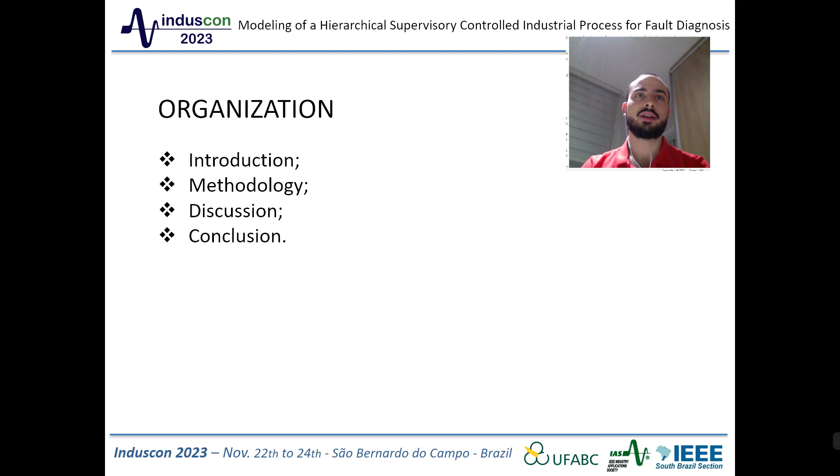This presentation is divided into introduction, methodology, discussion, and conclusion.

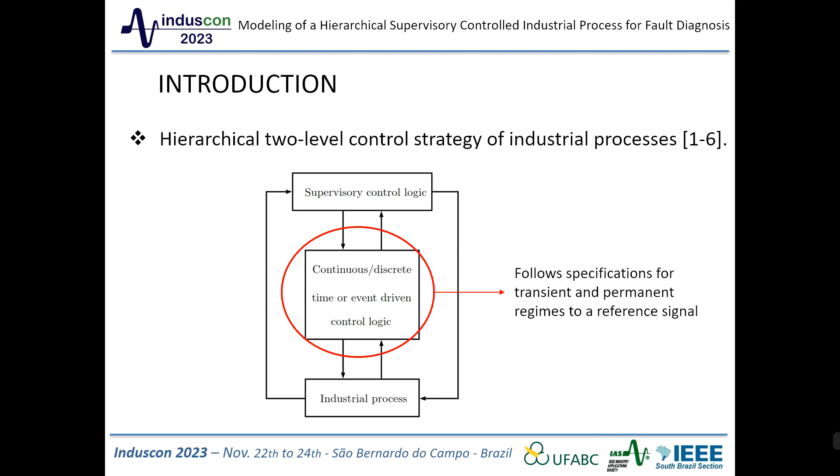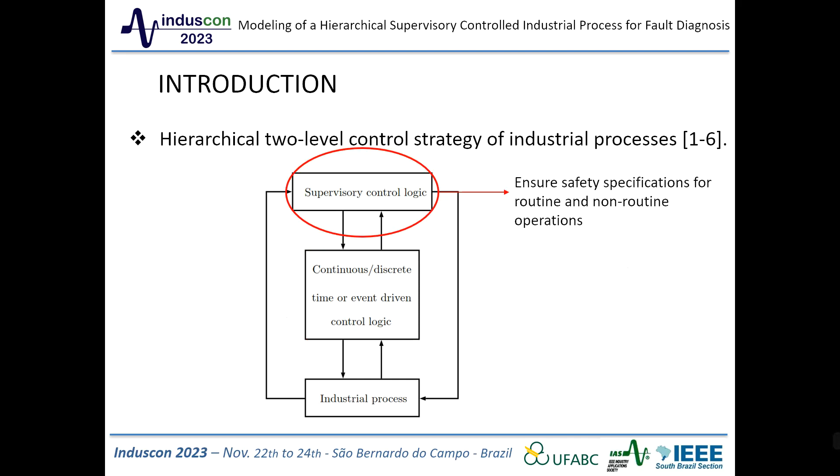We can find two-level control systems in industry. At the lowest level, we have continuous time, such as proportional integral derivative control, implemented to guarantee that the system behavior follows the specifications for transient and permanent regimes to a reference signal. At the higher level, a supervisory control strategy is implemented to ensure safety specification for both routine and non-routine operations. However, both levels of control strategy are designed considering the nominal behavior of system components, and thus the consequences of fault events are usually not taken into account in the project of control logic.

At this point, fault diagnosis is an important part of the safe operation of industrial systems, since the occurrence of a fault event can lead the system to unpredictable behaviors.

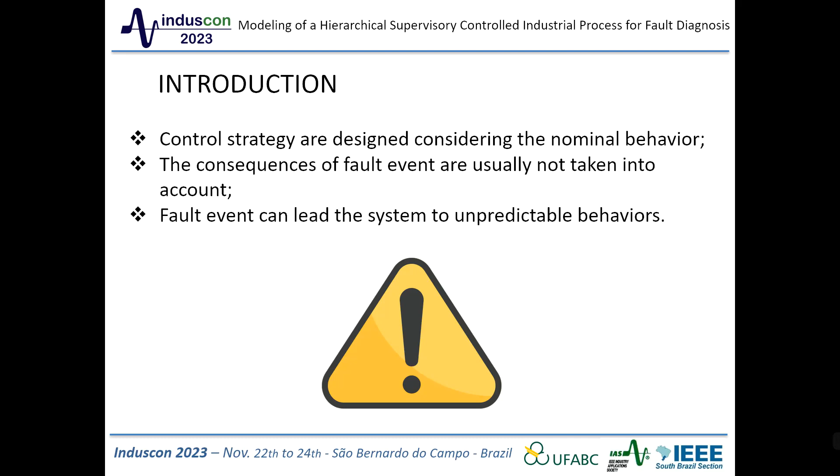We are dedicated to following the plant model behavior using a diagnoser, obtained by labeling the system states as fault-free or not, and computing an observer of the labeled model. If the diagnoser reaches a state with only faulty labeled states, the fault is diagnosed and a signal is sent to the system operator.

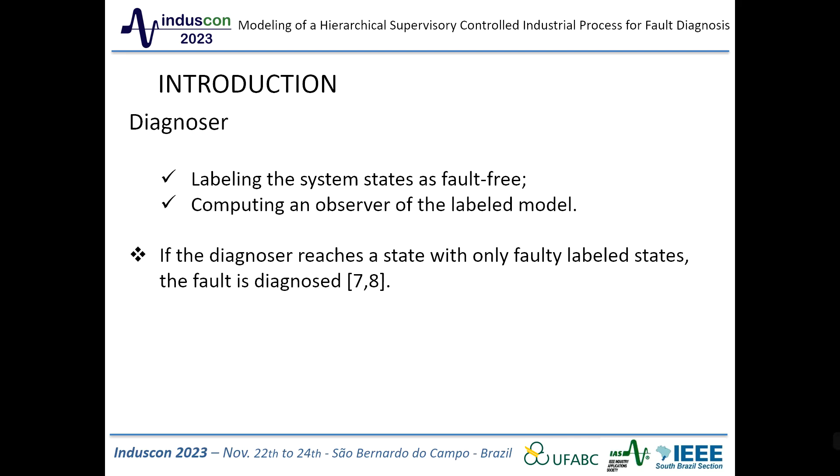In this paper, a modeling strategy to represent both the fault-free and the post-fault behaviors for a common industrial process is proposed. To do so, we modify the component models of the system used in the supervisory control project to introduce the fault event and the post-fault behavior.

The global post-fault behavior of the system is computed by the interaction of the supervisory control logic already computed in the project stage. In this work, we use a real industrial process as a case study.

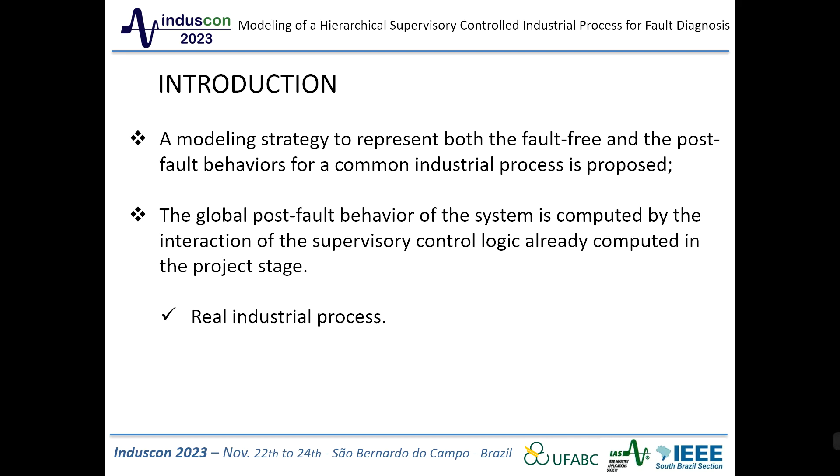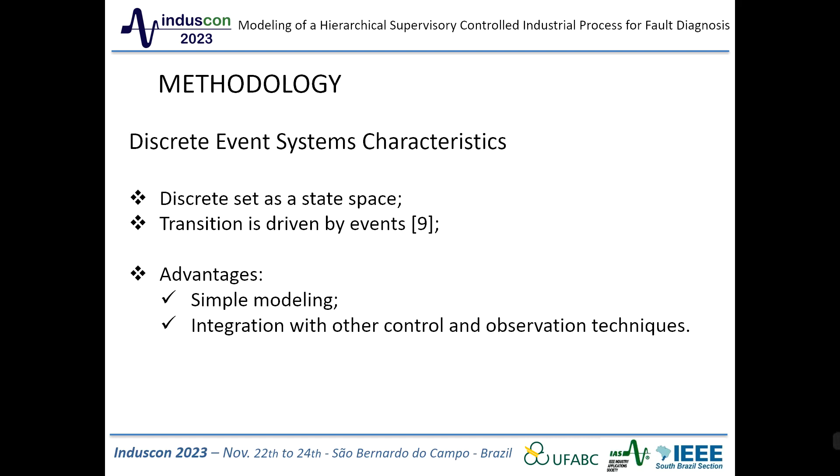Discrete event systems, as used in this work, present a discrete set as a state space, and the transition is driven by events. Considering systems like this brings a series of advantages, such as simple modeling and integration with other control and observation techniques. One of the formalisms used to represent language generated by discrete event systems are automata.

Using this tool, the language is represented with well-defined rules, with easy representation of the system using a state transition diagram. The states are represented by circles. The transition between the states are the events, and are represented by arcs. The initial state is an arrow without origin, and the marked states have double concentric circles.

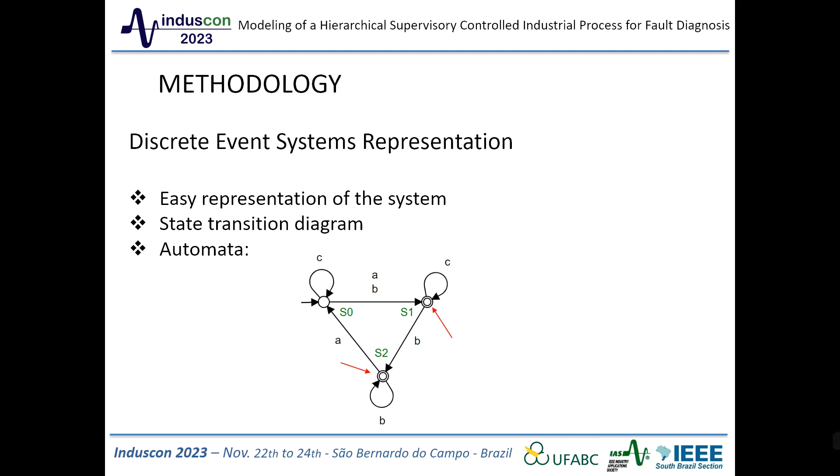The system considered in this work is a pilot plant manufactured by Smar Industrial Automation, installed at the Federal University of Santa Catarina for training and research of advanced control and automation technologies.

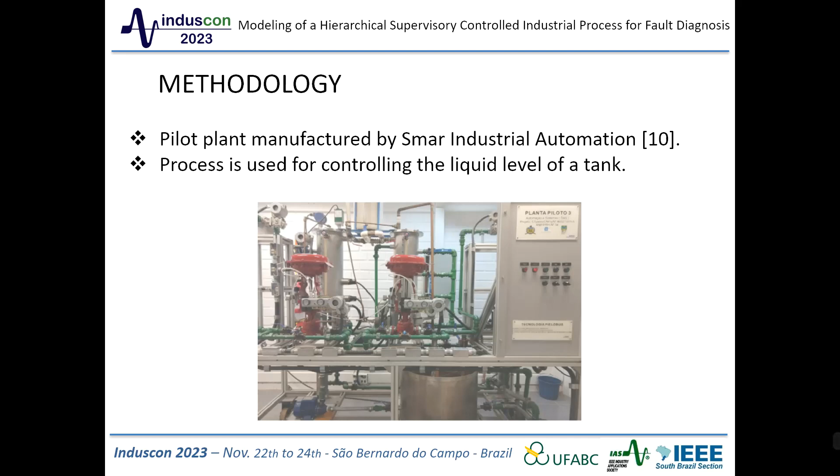The industrial process is used for controlling the liquid level of a tank. To do so, it consists of a pump that supplies liquid to the tank and a pneumatic valve that is used to regulate the liquid level of the tank.

The instrumentation of the system is composed of two intelligent foundation field bus sensors, a level sensor in the tank, and a valve position sensor, which are used to implement a distributed PID control system. In addition, the PLC also receives the signal from a selector switch implemented on a human-machine interface panel, and it can control the pump.

The supervisory control for this system is designed to prevent underflow or overflow of the tank due to misoperations. Thus, the supervisory control limited the system to the nominal behavior of the system components.

Thus, if a fault event occurs, its detection must be computed to allow the replacement of the faulty device. The fault behavior is not desirable since it causes deterioration of equipment.

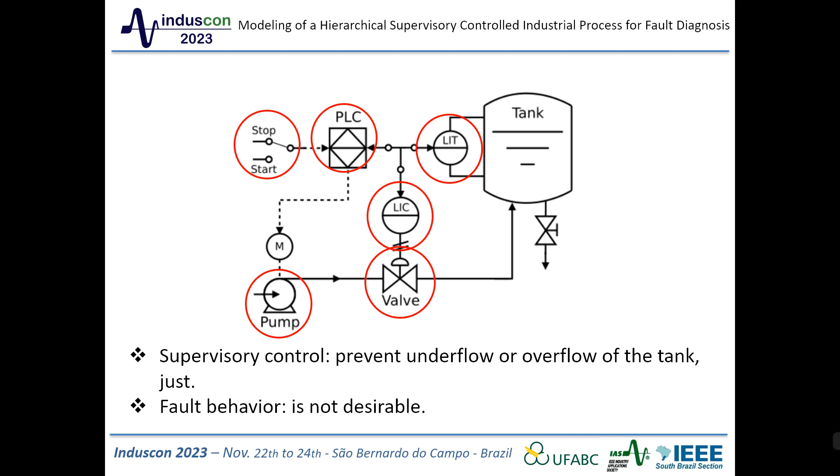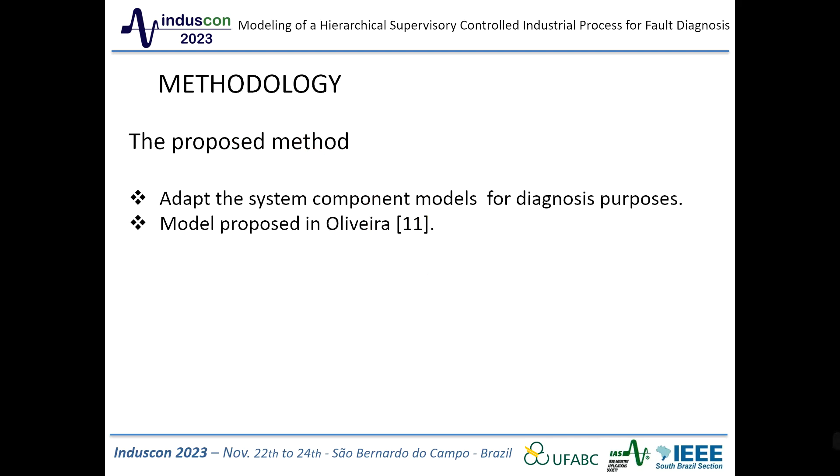The proposed method aims to adapt the system component models for diagnosis purposes. The model used in the project of the supervisory control, proposed in Oliveira for the system, are presented in the sequence. The system is composed of 7 modules.

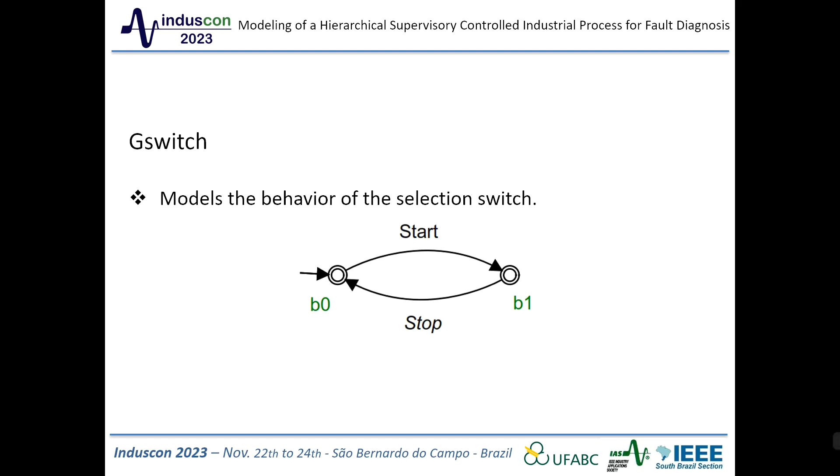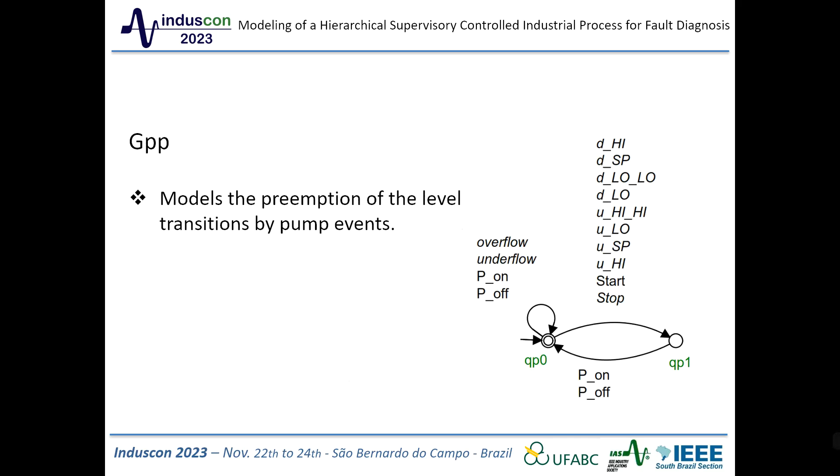G switch models the behavior of the selection switch. G level models the level of liquid in the tank. G pump models command events to the pump according to changes in the tank level. GPP models the preemption of the level transition by pump events. G valve models the valve behavior. GPV models the preemption of the level transition by valve events. And G flow models the flow of liquid in the tank.

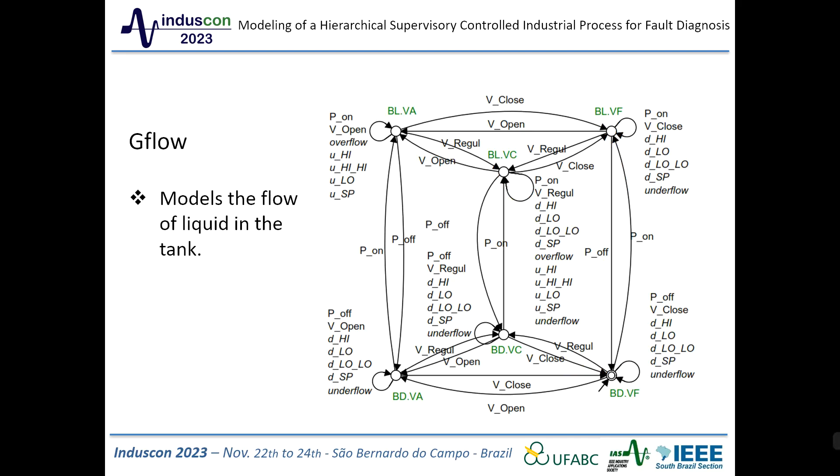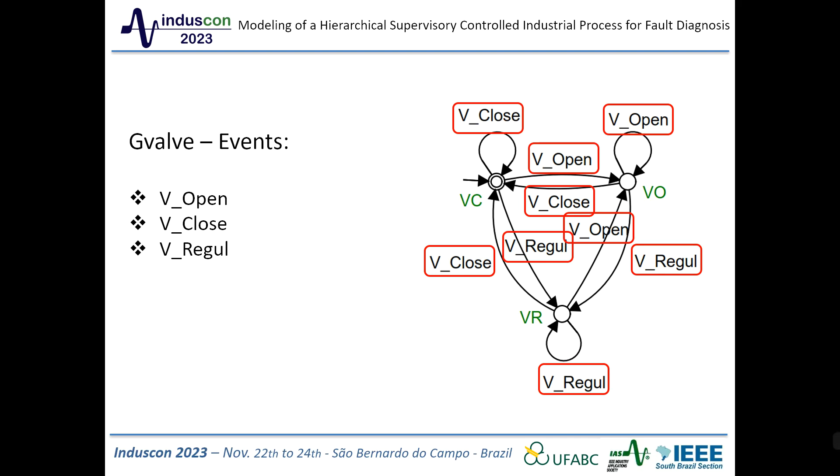Let's take into account the valve model. In the valve model, VOpen and VClose symbolize the command event to open and close the valve, respectively. The event Vregul is used to represent the switching of control from the supervisory to the PID control.

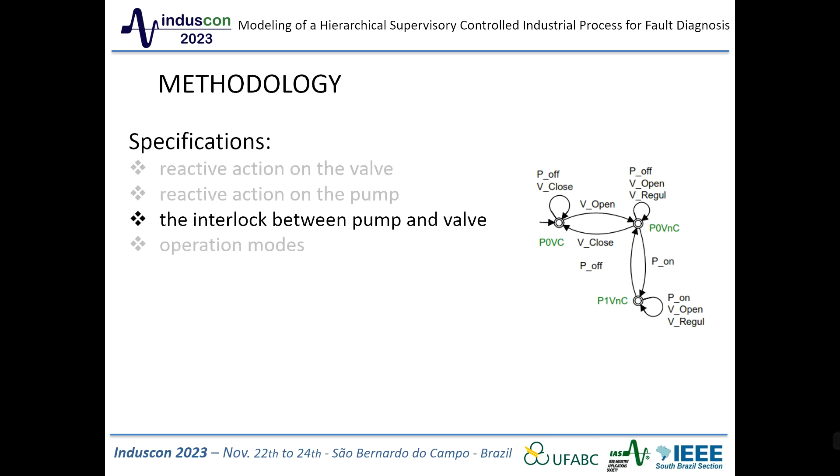For these systems, four specifications are considered to ensure safety constraints: reactive action on the valve, reactive action on the pump, the interlock between pump and valve, and the operation modes.

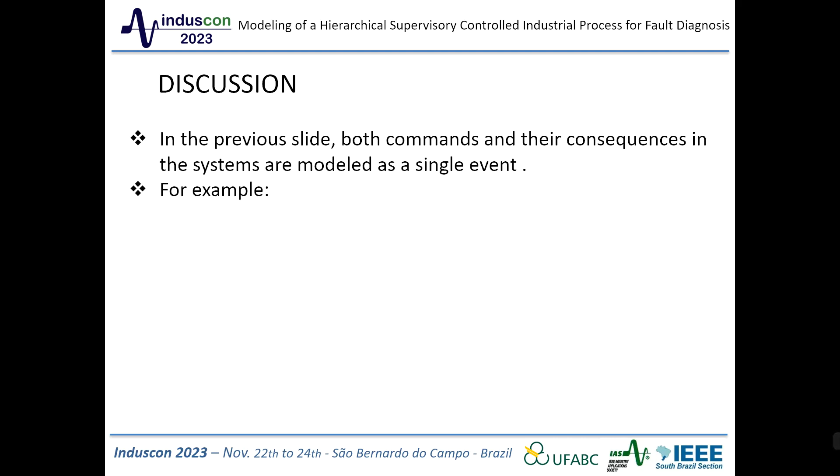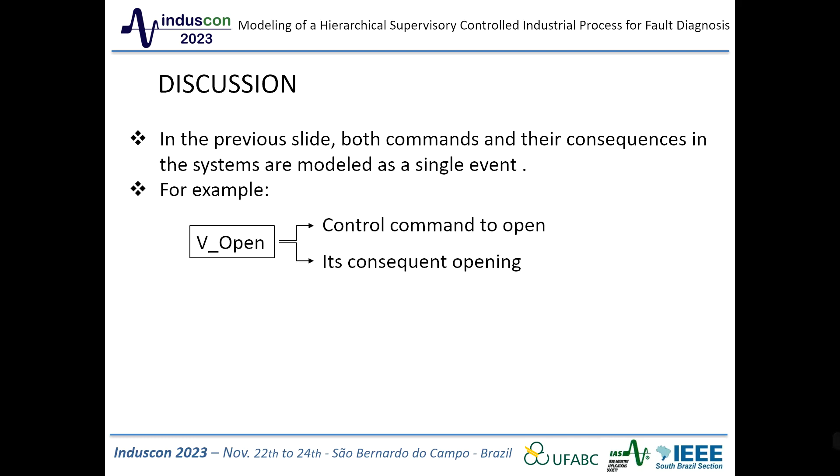In general, the supervisory control project is done considering the models of the previous slide. In this context, both control commands and their consequences in the systems are modeled as a single event. For example, event VOpen of the valve model models both the control command to open the valve and its consequence, opening. However, if the valve is stuck closed, the control command to open will be sent the same way, but the valve will not physically open.

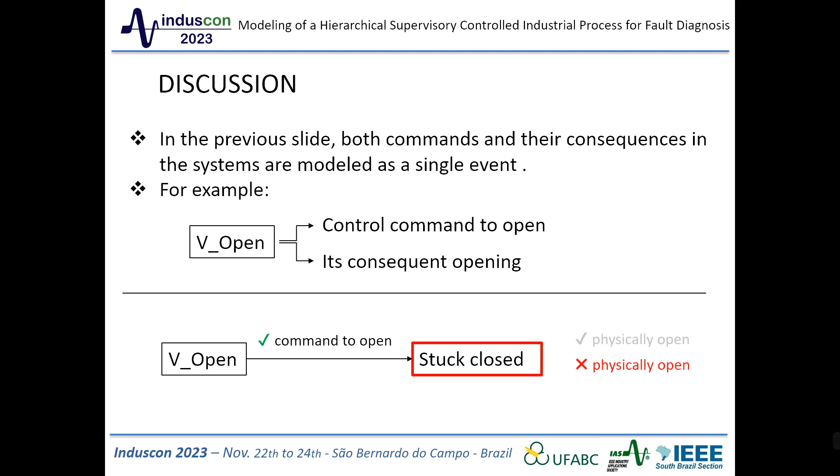Thus, the first step to solve the problem of fault diagnosis for industrial processes is to separate events into control commands and their physical consequences.

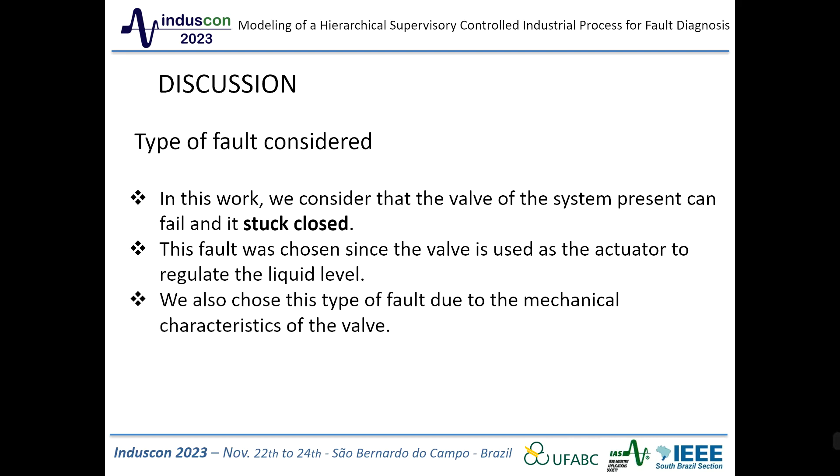In this work, we consider that the valve of the system present can fail and it gets stuck closed. This fault was chosen since the valve is used as the actuator to regulate the liquid level. We also chose this type of fault due to the mechanical characteristics of the valve.

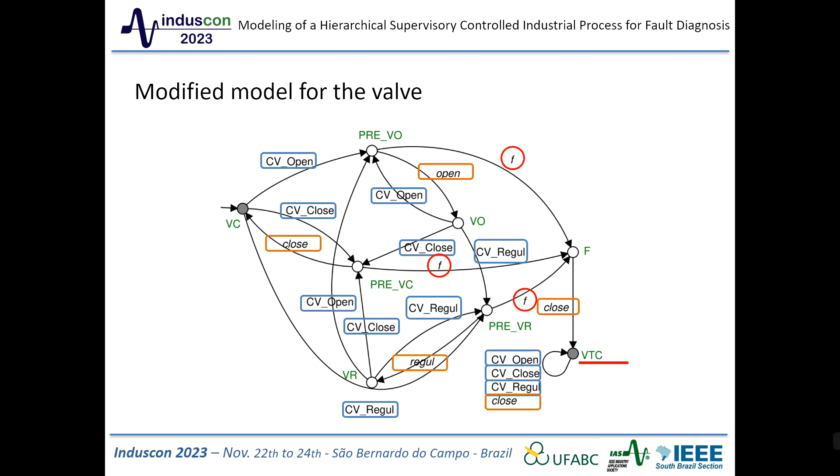We use event F to represent the fault event, and we consider that the valve can fail after any command, which leads the system to state VTC.

The modifications to the valve are simple to make, but the fault is not diagnosable because there is not enough information considering only the valve dynamics. It's necessary to take into account the interaction of the valve's post-failure behavior with the other components of the system.

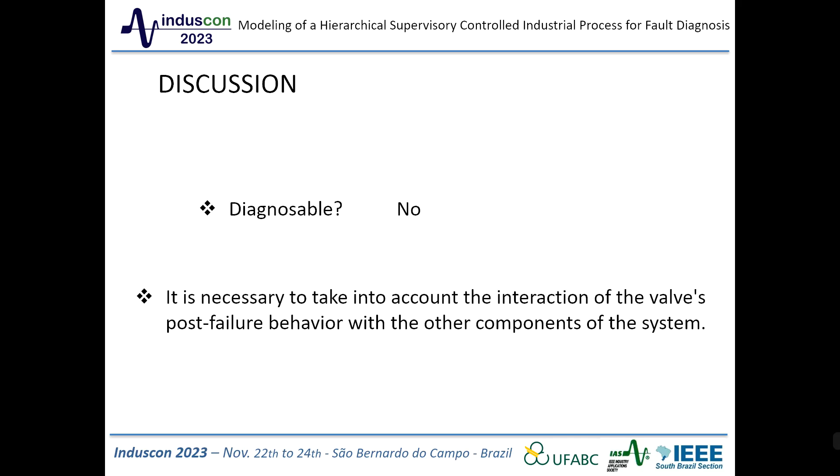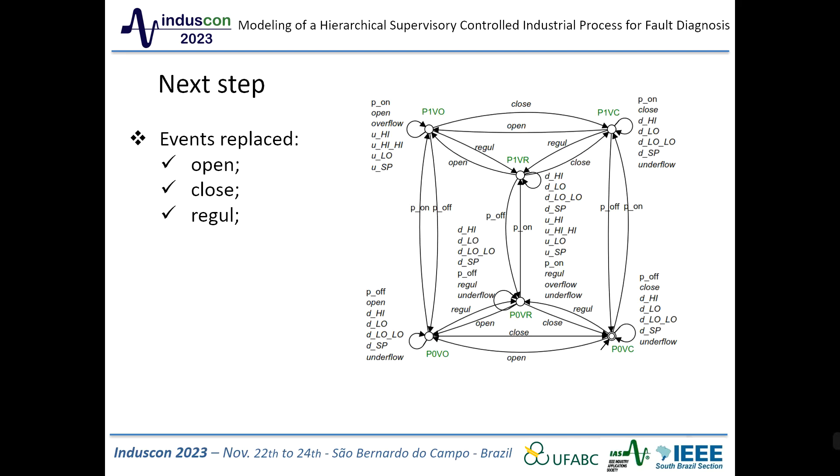We start by replacing the valve events in the G-flow model with the Open, Close, and Regul events, since only the physical behavior of the system components is described in G-flow. On the other hand, the valve preemption model GPV receives the command events CVOpen, CVClose, and CVRegul to represent that at least one control command is always taken on the valve between two consecutive level transitions.

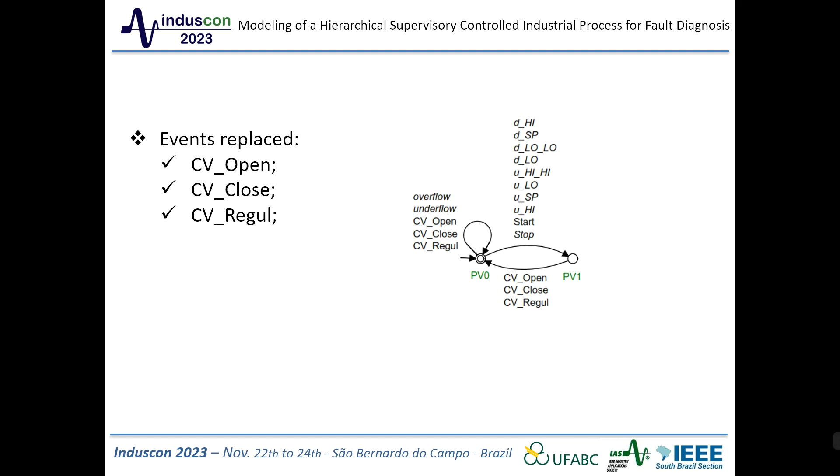In the supervisory control framework, the specifications are used to compute the supervisor, which can disable events to assure that the closed-loop system satisfies these specifications.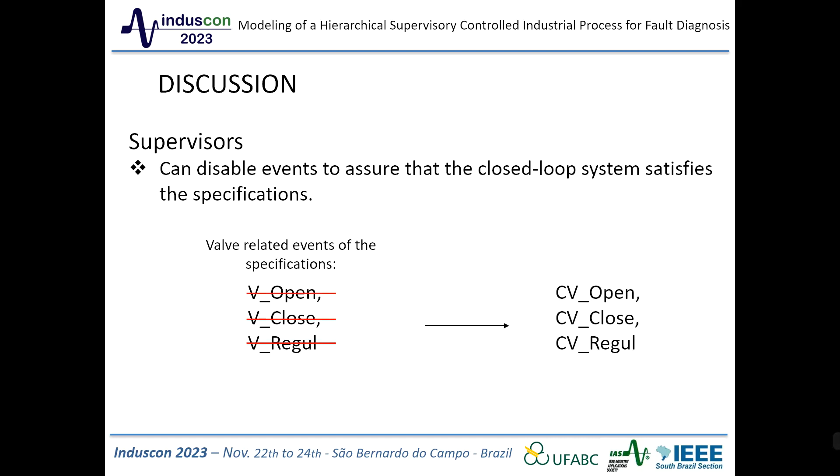Thus, in the specifications model presented, valve-related events VOpen, VClose, and VRegul are replaced by CVOpen, CVClose, and CVRegul, respectively, since only these events can be disabled by the supervisory controller.

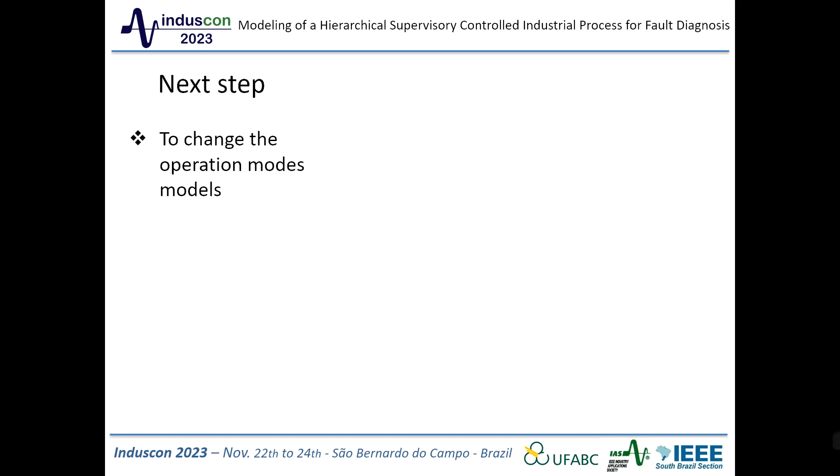The next modification is to change the operation modes models. As the operator can stop and start the system according to the original model, the global plant model is not diagnosable yet. We propose a new model to represent the change in the system operating modes.

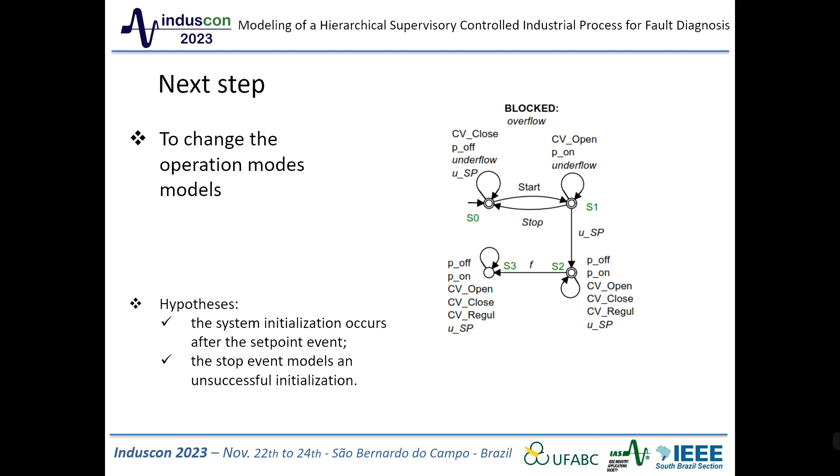Two hypotheses are made: the system initialization occurs after the USP event, and the stop event models an unsuccessful initialization.

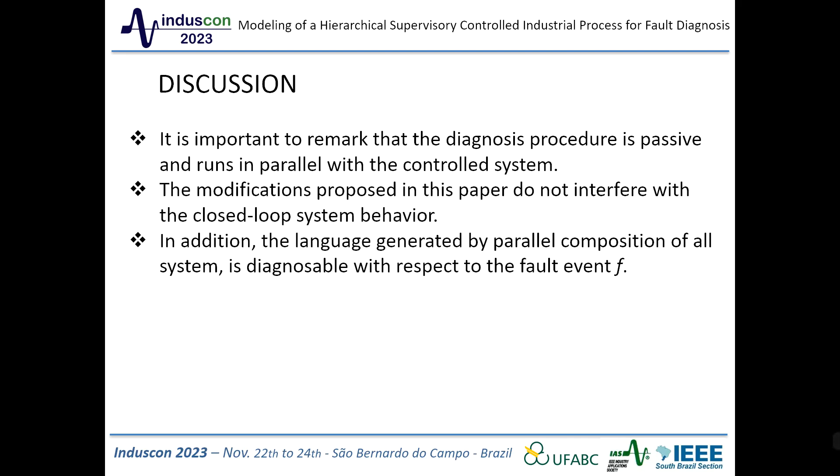It's important to remark that the diagnosis procedure is passive and runs in parallel with the controlled system. The modifications proposed in this paper do not interfere with the closed-loop system behavior. In addition, the language generated by parallel composition of all systems is diagnosable with respect to the fault event F.

In this paper, a modeling strategy for fault diagnosis is proposed. The post-fault behavior for the supervisory control project is modeled. The global plant model is diagnosable, which shows that the proposed method can be applied to industrial processes.

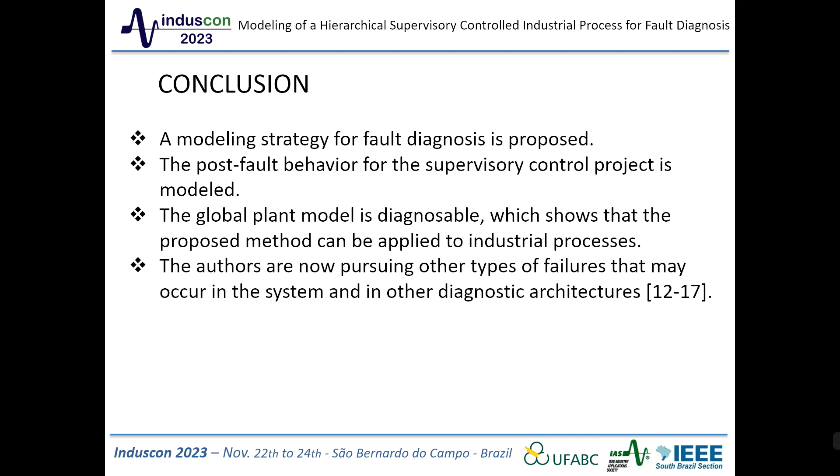The authors are now pursuing other types of failure that may occur in the system and in other diagnostic architectures.